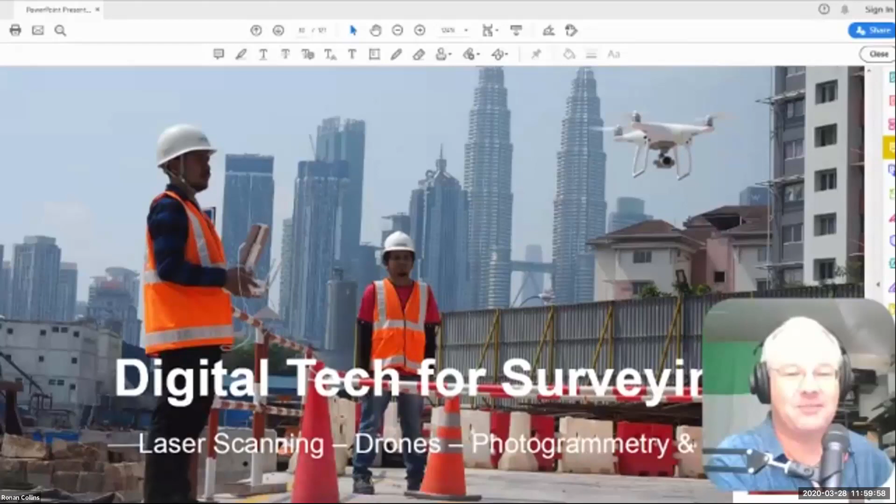So what we're going to do now is get into some digital technology for surveying. I'm not sure how many people here have played with or used a drone, but what I'm going to show you now is how we're using drones and laser scanning for our construction projects. And I'm not joking when I say this is transformative technology.

We have seen immense value from these technologies. But what's important in what I'm going to show you now is that this was started as a top-down approach, where a number of people, myself included, were promoting the use of some of these technologies. But what we did was we showed some key people what was possible, and then we invited them to take it on and drive it.

What has transpired is that the head of surveying for Gamuda, a very experienced man, probably in his late 50s, has taken on the role of allowing his surveyors to be trained to become drone operators. He's taken on the role of allowing people to use laser scanning. He's given all of his staff iPads, and he's demonstrated immense savings in terms of their time on site and their accuracy in the information they're providing. So he has taken an idea and run with it.

This is what's really important: we need to find the existing staff in these corporations, whether they're contractors, engineering firms, or architectural practices. We need to find the leaders of those companies, get them inspired, and get them to drive their teams to change. And this is a brilliant example of it. There's no way that a technology guy like me sitting in a major corporation could have affected the kind of change unless it was affected by the actual head of surveying.

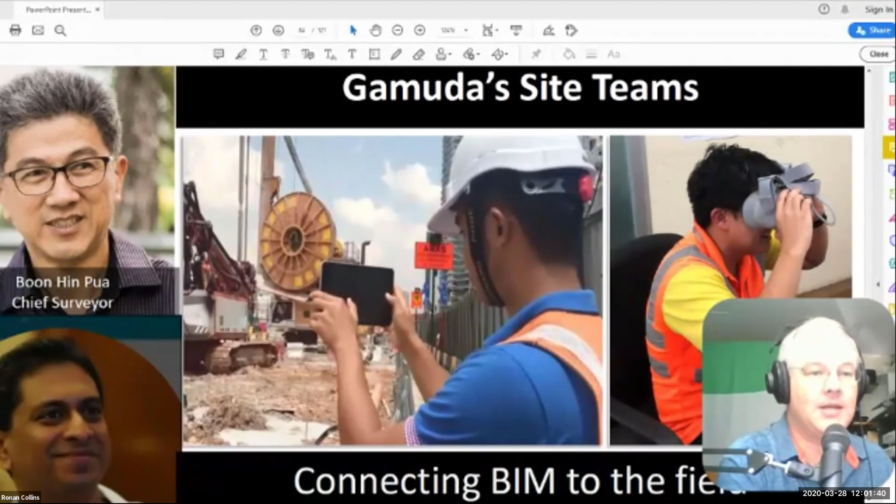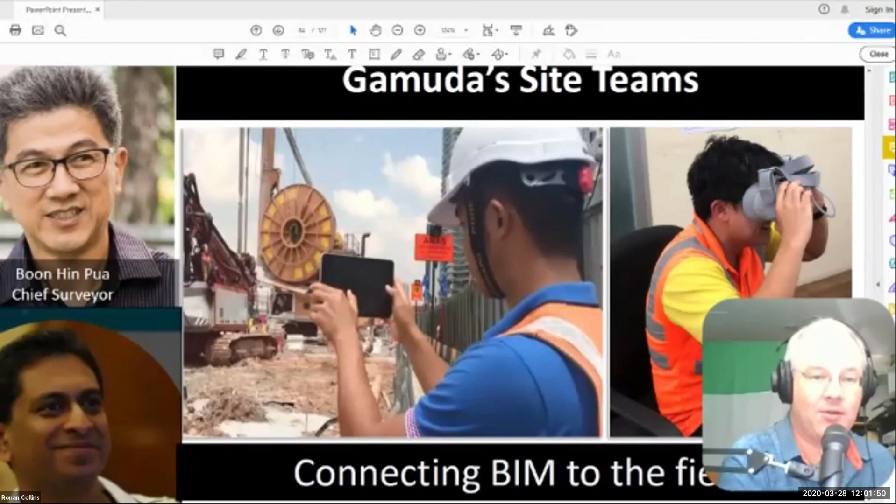So let me show you what they've been up to. The guy I'm speaking about is this guy in the top corner. This is Pua. He is basically the chief surveyor for Gamuda Construction. Given the scale of our business, you'll understand how important that role is. This is one of his team on site with an iPad, and this is one of his team playing with a VR headset.

And this is Tony Joseph, who's our DevOps. Tony is responsible for the back end of all the systems that I'm going to show you. He's been writing code, setting up GIS platforms, setting up Amazon Web Services, Microsoft Web Services, you name it. Anything with ones and zeros in code, Tony is all over it. Their job has been to connect BIM to the construction sites by whatever means necessary.

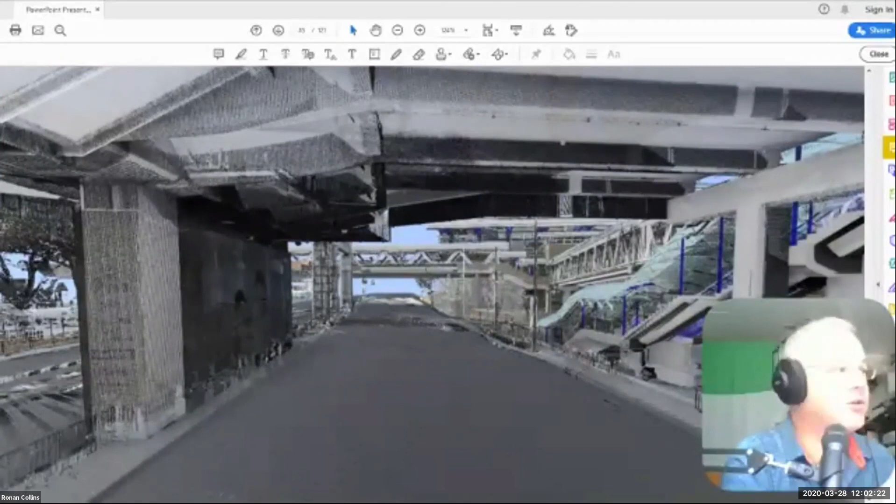So I'm going to show you some examples of what they've done. And the first example I'm going to show you is laser scanning. We have done a laser scan survey. Let me get the video.

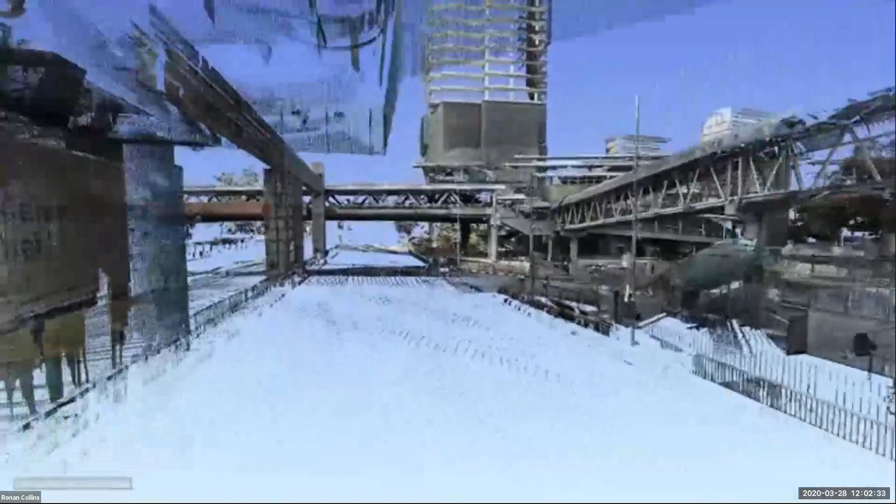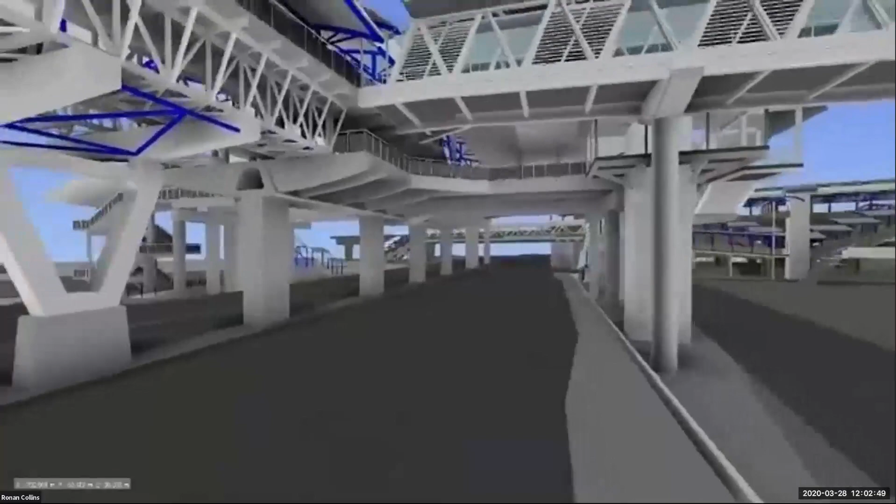So this is a laser point cloud scan of the same Titiwangsa station I showed you earlier on. We've done this for every single construction project, and we've used the laser scan survey to build a reference model in Revit for the design consultants. In this case, as a management contractor and design and build, we know how complicated these interfaces are going to be, and how important it is to get the geometry and the surveying correct.

A traditional surveyor will give the design consultants a two-dimensional drawing. In our case, we've gone out on site and used laser scanning to create a point cloud mesh of the entire environment we're working in and around. We've identified all the key structures we're going to interface with, modeled those, and given those models to the consultants, saying: we're not giving you traditional 2D survey drawings, we're giving you a 3D model referenced to the data in local grid, referenced to the actual survey grid. We want you to use that model as the interface tool, so when you model connecting bridges or underground structures, you have an accurate reference 3D model.

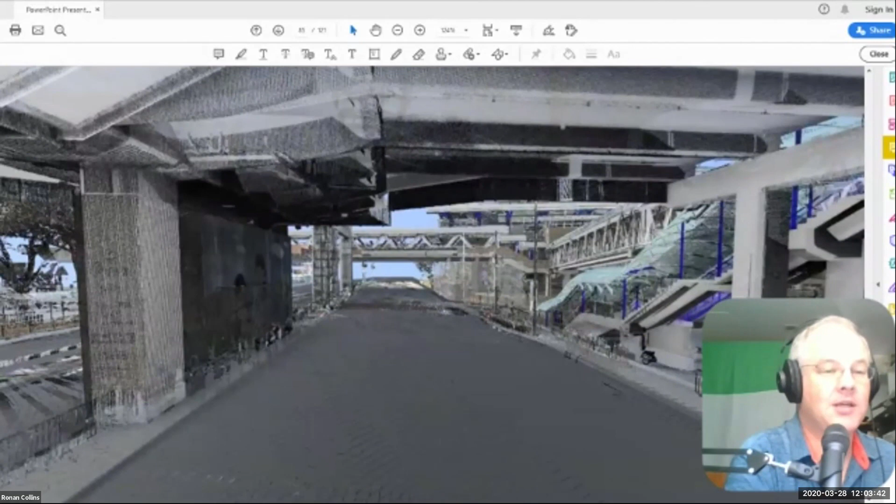So the first thing we've identified is the use of scanning and modeling as a way of demonstrating as-built conditions. The next thing we've done is we've taken that to the next stage and used drones.

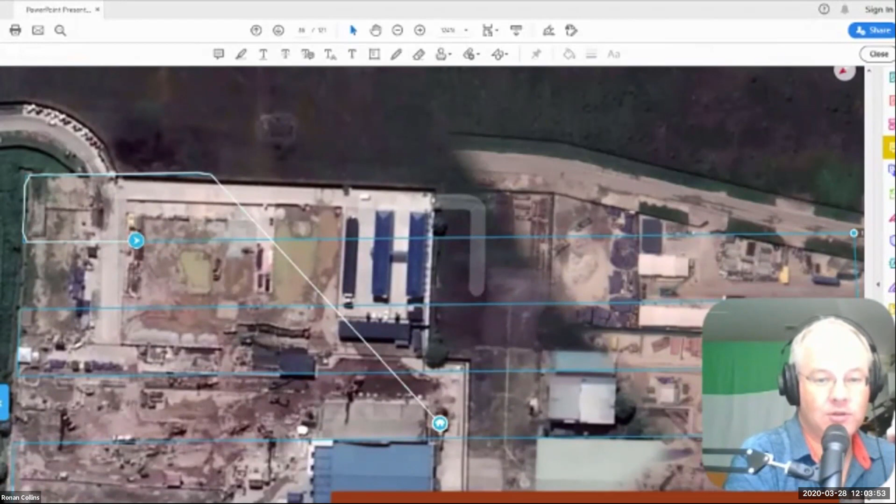I'm going to play you a video, and the video has its own narration, and it's going to show you how we do image capture by drones. Let me set that up and I'll play it for you, and then after the video we'll take some questions.

Our team use software applications to plan and control each drone flight. The drones can quickly cover a large area of a site in a controlled manner, collecting hundreds of overlapping photographs in less than an hour.

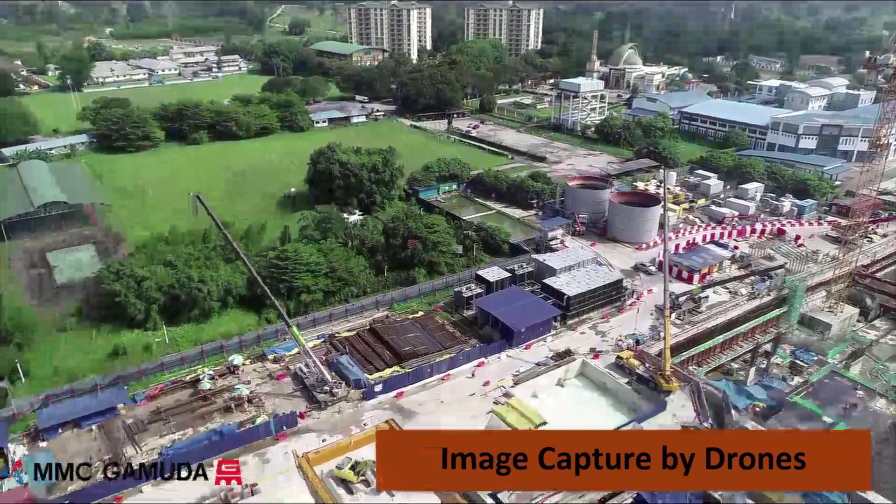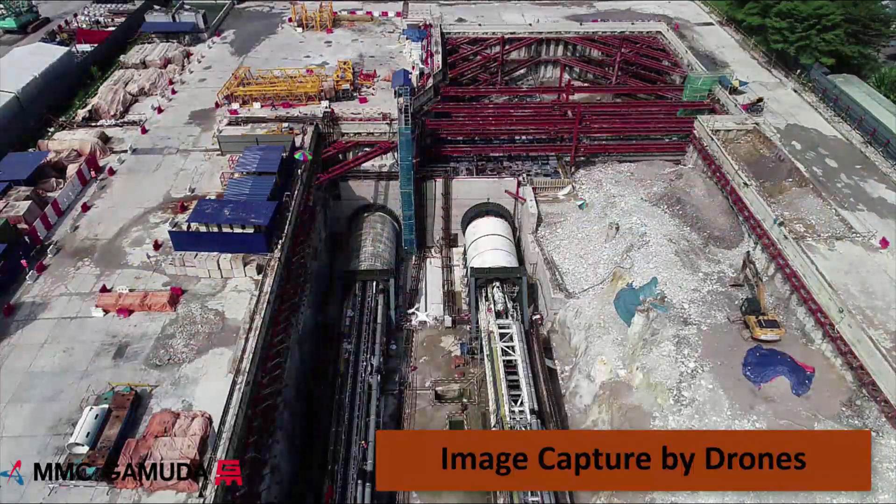The drones operate at 60 to 100 meters above the sites, and they can also operate at lower elevations where we need to get photographs of activities inside the site. Here is an example of the drones flying over two TBMs, which are about to be launched for the two southern tunnel drives.

Safety is our priority. All of our pilots and spotters have been trained to use launching pads in a safe, cordoned area away from site activities. The drones, batteries, iPads and controllers are thoroughly checked before each flight. Here you can see the pilot assembling the drone and checking the propellers. The pilot turns on the drone to make sure it's properly connected to the controller and checks it has acquired the GPS satellites.

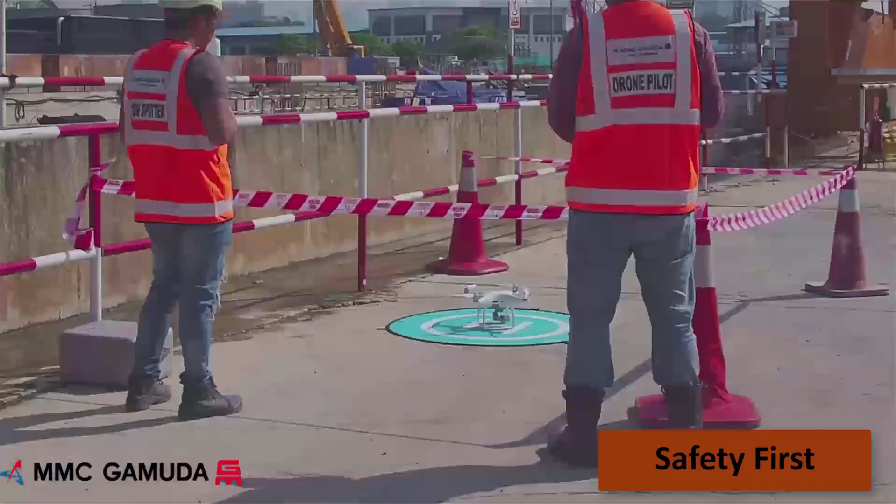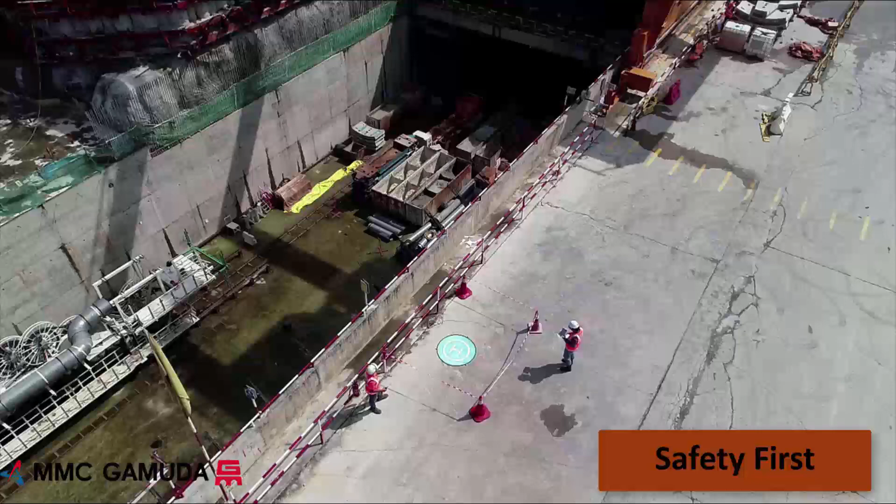For every flight operation, we assign a drone pilot and at least one drone spotter. At the end of the flight operation, the team makes sure the drone returns to the designated area in a safe, controlled manner. The drone pilots are identified by a specific safety vest, and they are responsible for the safety and operations at all times. The drone spotters keep track of the drones and the surrounding airspace during all the flights. They are in constant contact with the pilot and the site safety manager.

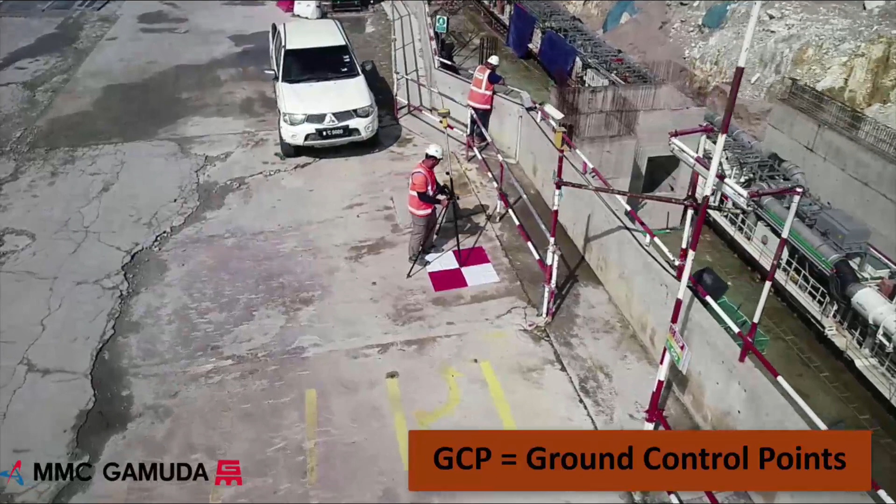In order to ensure that the survey photographs are tied correctly and accurately to the local Cassini grid, we use sets of 3 to 4 ground control points for each survey. The ground control points, or GCPs, are recorded using GPS coordinates by one of the surveyors, and these are needed for the photogrammetry process. A common use of drones is the production of orthomosaic photos.

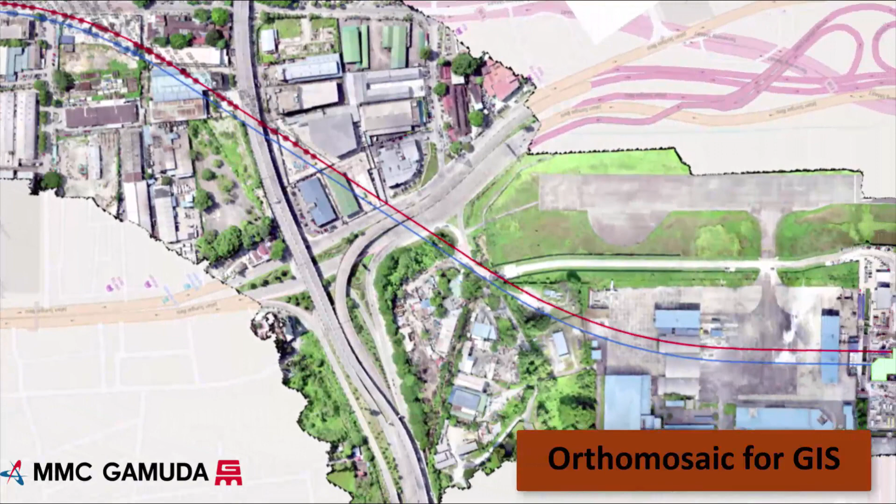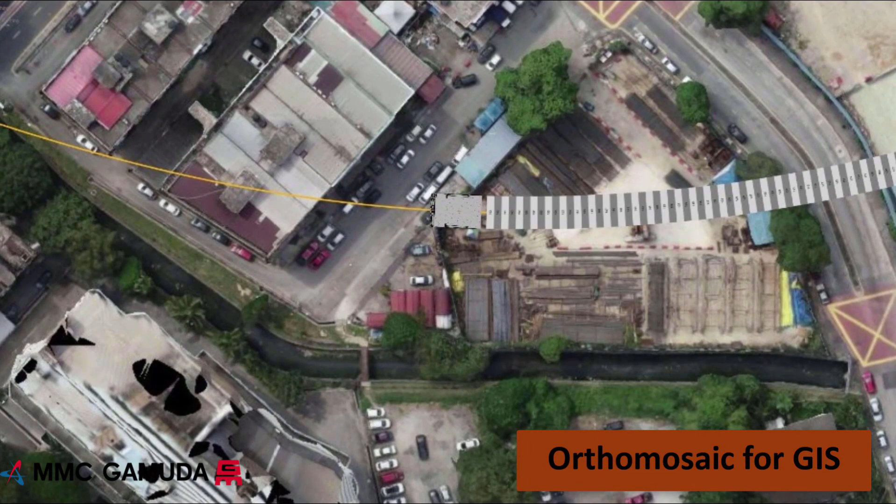This is the tunnel alignment between Chan Sow Lin and Bandar Malaysia North. The ortho photos are used in GIS and are of a higher quality and more accurate than publicly available data. Here you can see a typical image from Google Maps or Google Earth, and if we overlay our orthomosaic photo, we can see the difference in quality and accuracy. We can very precisely position the TBM underground in relation to the above ground structures. Drones save us a lot of time in creating accurate ortho photos for mapping.

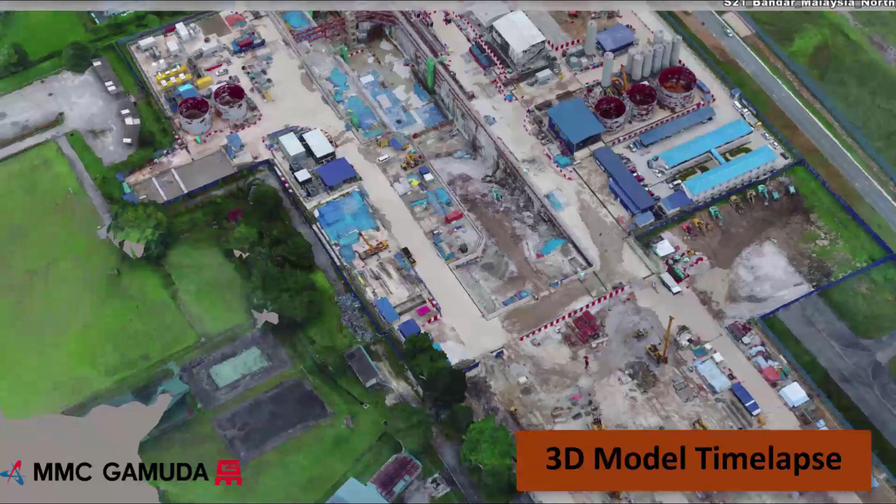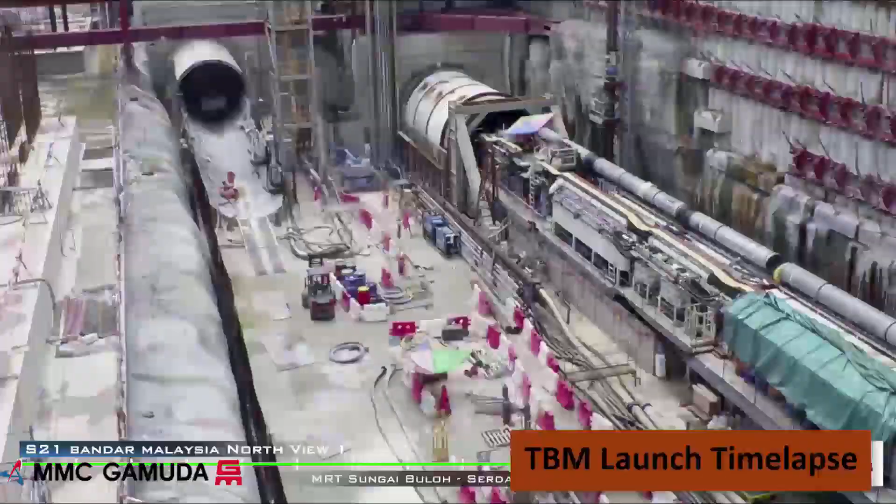The drone surveys are used to generate 3D models of each site. In this series of models, from July 2017 to April 2019, you can see the site progress in 3D for Bandar Malaysia North. A traditional time-lapse from a fixed camera position looks like this. It provides a good visual record of the daily site activities, but we cannot use this for surveying or for measurement. The drone surveys do allow us to do a lot more than just look at visual information.

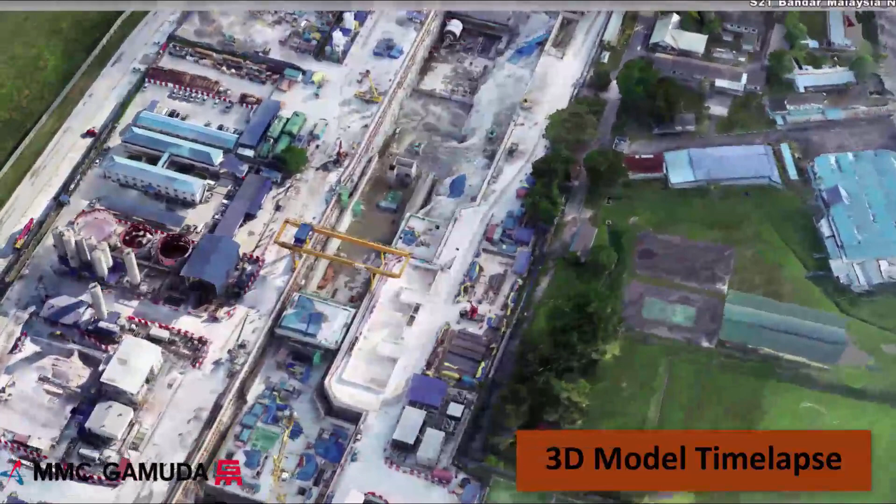You can see excavation works, the TBM assembly and launch, and you can see permanent structure construction. The sequence of models taken over this 18-month period is a very useful way of looking at progress over a longer period of time. As they are 3D models and not simply photographs, these site models can be used for measurement and analytics.

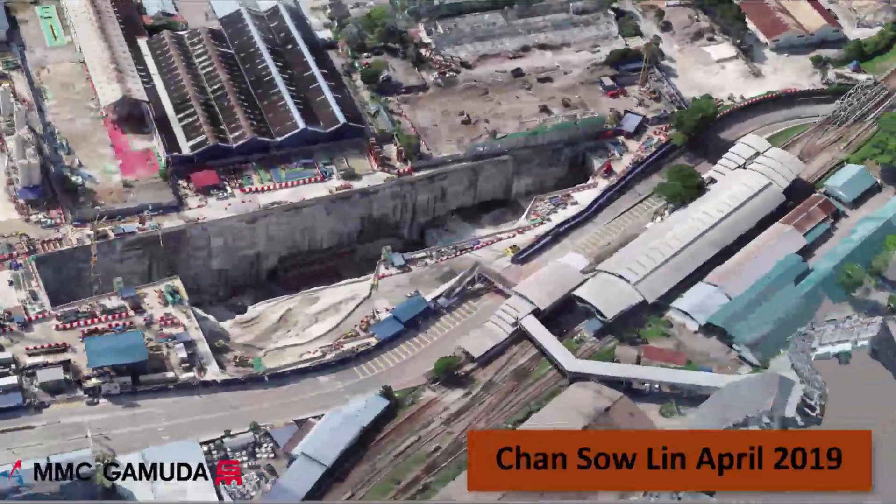This is the Chan Sow Lin construction site. This is the context capture model from April this year, and we can see the TBMs have arrived in the station box excavation, and you can see the construction of the permanent works are underway.

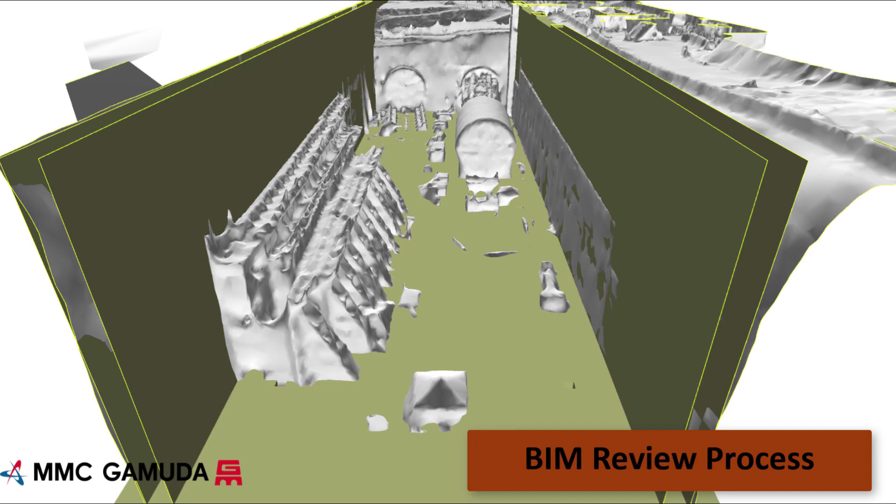The 3D model derived from the photographs, surveyed using GCPs, can be reviewed and compared to the design BIM information. Here we can see the station box walls have been constructed in accordance with the design. Using the design BIM information, we can overlay the structural BIM for the station box with the drone survey models to review the excavation sequence in relation to the station design.

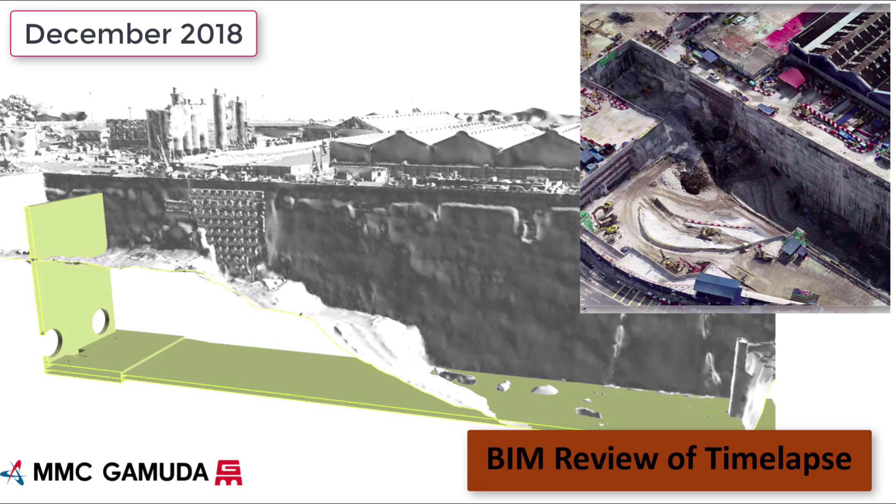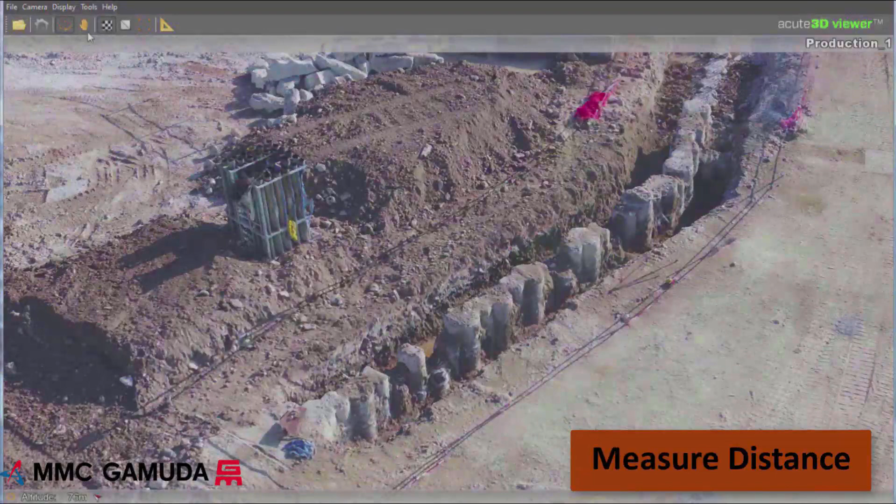We use the models extensively for measuring as it saves us a lot of time. In this example, we completed a drone survey of the piling works, and we can measure the length of a section of the constructed secant pile wall.

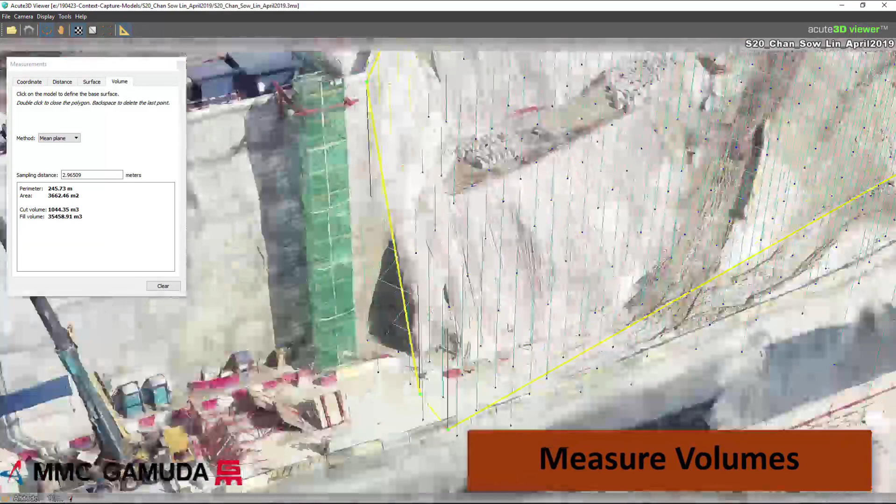Drones enhance our safety procedures. If an area is inaccessible or unsafe, as in this example of a slope collapse, rather than sending staff to investigate, we can use drones to safely conduct a survey. This allows us to plan our work safely and identify the risks before workers enter an area of the site.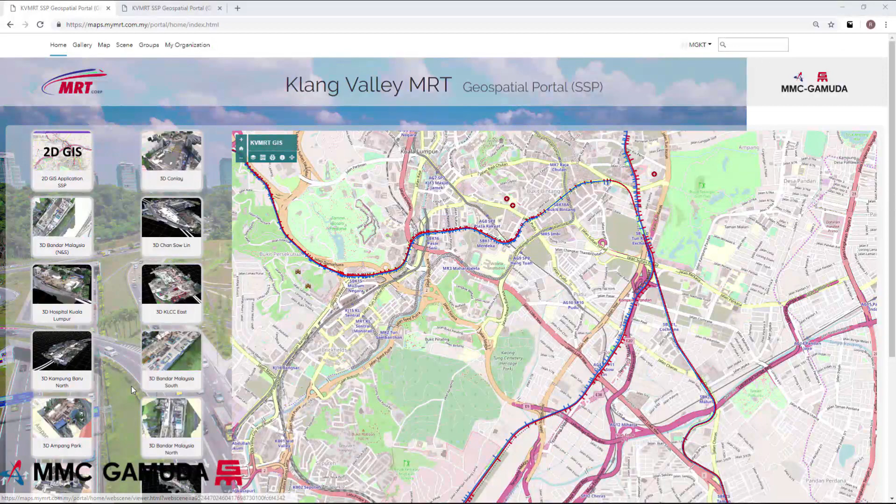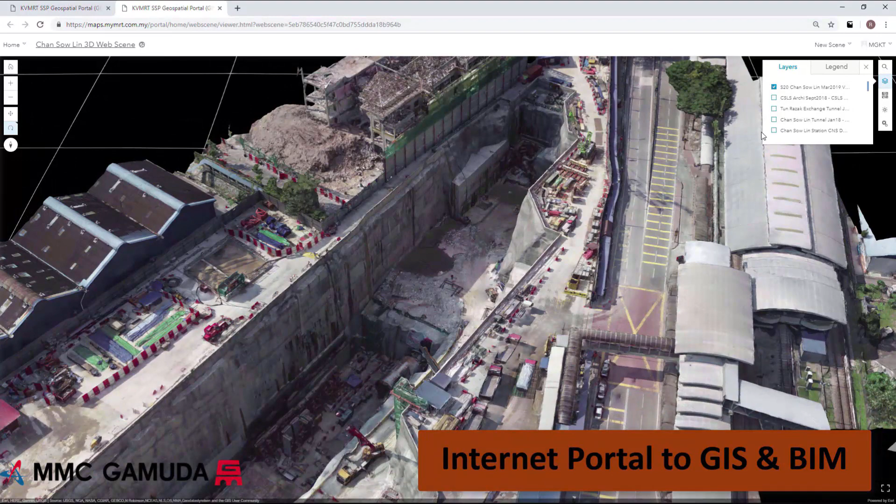The drone surveys are readily available to all of the project teams via our online cloud platform. In this example, using a web browser, we can identify all of the available survey data. Each site model is available online and can be viewed via the internet. The BIM data for each station is available to be viewed with the drone survey data.

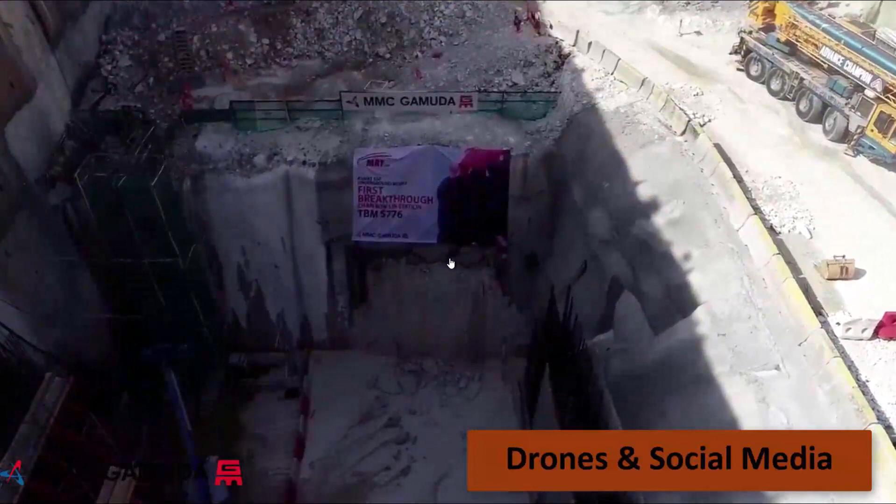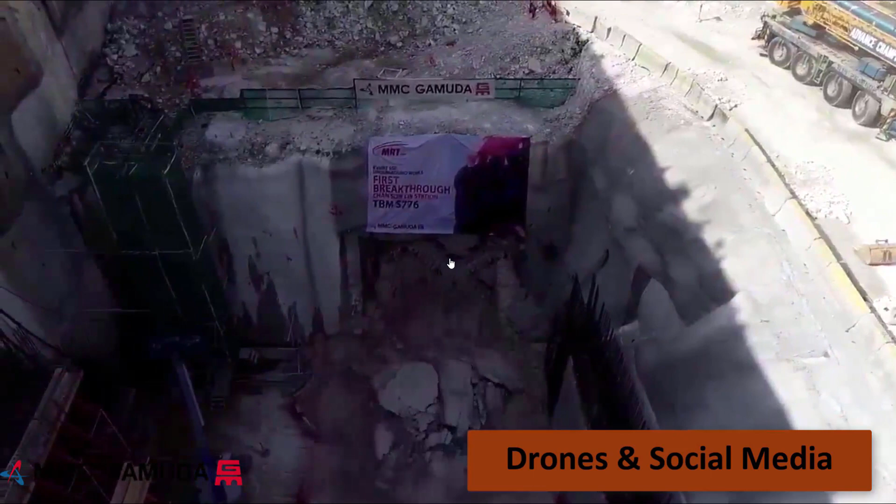Our drone surveyors recently demonstrated a fun and innovative way to use the drones for construction. For the first TBM breakthrough, a major milestone for our project, the survey team used drones to safely give everyone a bird's eye view of the tunneling works. The video was streamed directly from the drones to our social media channel, and hundreds of people watched the construction activity live online. We are very proud of our drone survey teams.

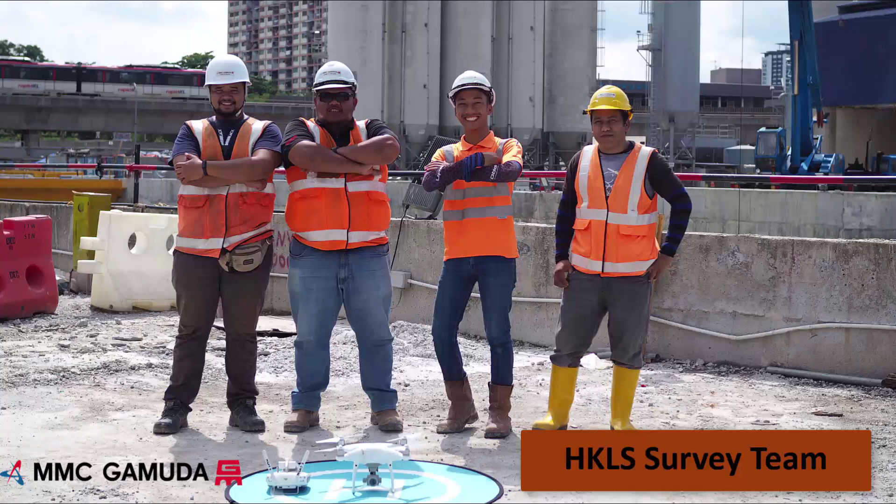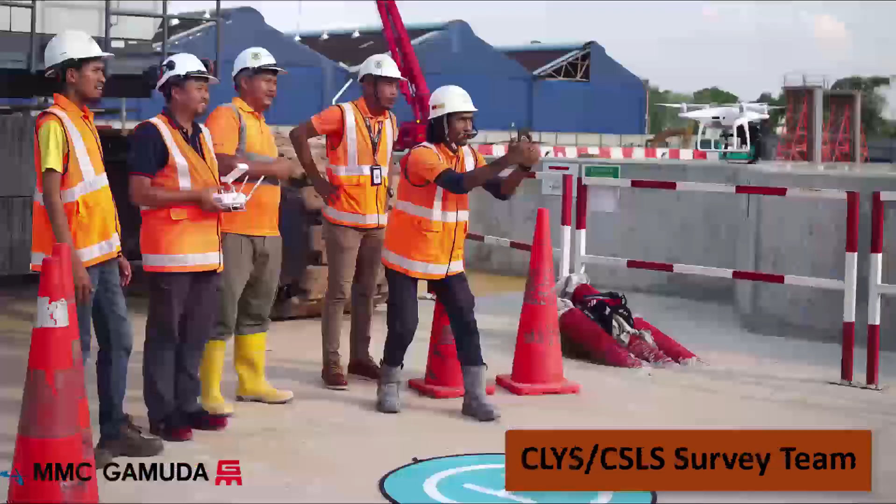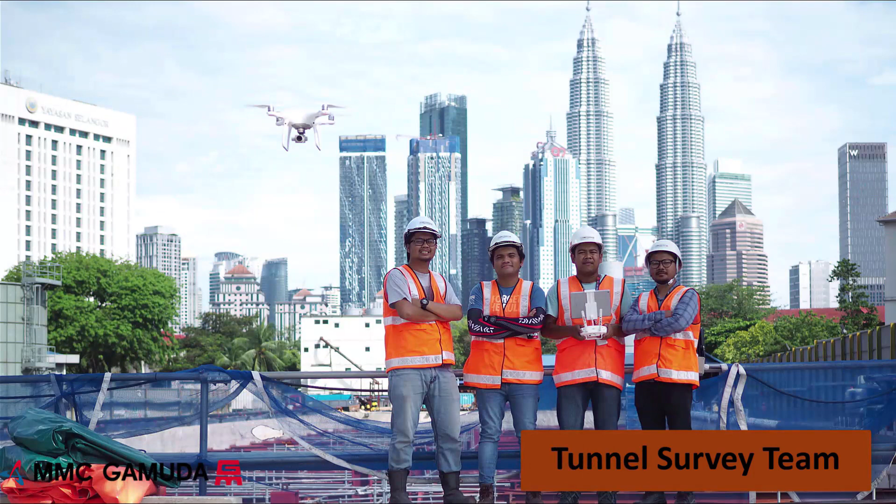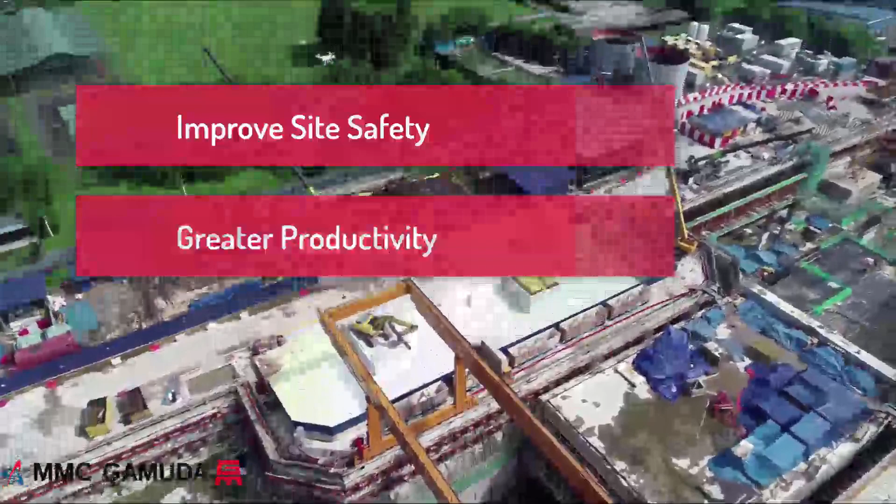We have a large team of trained pilots and spotters to safely operate drones and conduct flight operations across all of the sites. We have dedicated drone survey teams at Sentul West. The team at Titiwangsa are very proud of their drone survey roles. We have a happy survey team at Hospital KL. The large team at Kampung Baru, Ampang Park and KLCC East are proud to show off in front of the KLCC towers. Here the team from Conlay and Chan Sow Lin are having a fun moment with their drone. The team from the Bandar Malaysia North and South stations helped compile this presentation, and our tunnel survey team, who believe drones are now a key tool for their work. Gamuda Engineering are committed to using drones to improve site safety, construction productivity, and enhance our surveying capabilities.

That is a video that was produced late last year, and like I said earlier, it was used to promote what we're doing as a corporation, but it was mainly used to motivate the staff and get them to understand what was happening and to recognize those that had done the work.

So if you would like to learn more about it, there is an article on my LinkedIn page, which I'll send you a link to on the chat. In the article, we actually go through the process for doing this, how it's integrated with BIM, how it's connected to GIS, and we go through some of the key things you need to consider when setting up these drone operations.

So you've got indications of elevations you can operate in, how you set up ground control points, how you can use the meshes for, and basically you can see a presentation we actually gave in Singapore for the award that we picked up at the end of last year.

The reason I'm sharing this with you is we don't believe enough people understand how to use drones for more than just taking pictures. Most people know how to use drones to make a video or a picture, but we want people to use them for much more than that. So if you haven't already figured out how to use drones for surveying, feel free to read this article. And if you want more information, I can connect you to Mr. Poa and his team, and they will be able to give you more information.

So does anybody have any questions on that use of drones? Yes, Wing. Can I just ask a very basic question? Sure. So about all these info and videos and pictures, would that constitute a very big storage issue, basically?